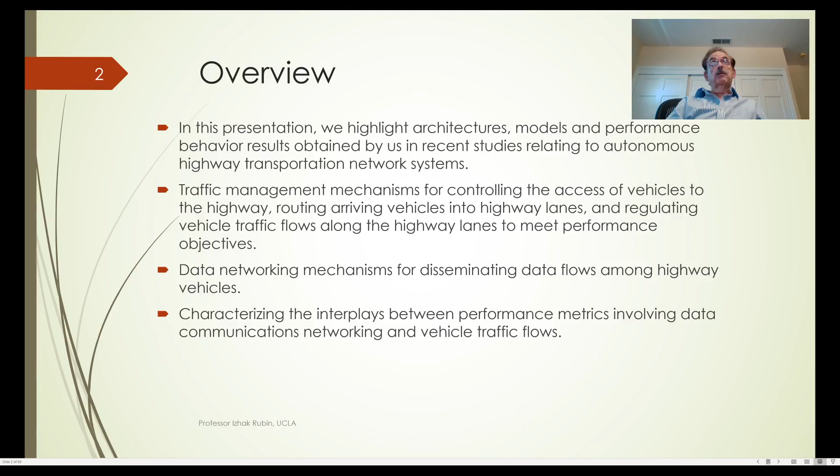I'll divide my presentation into two main parts. In the first part, I'll talk about traffic management mechanisms, and in the second part, I'll discuss data networking algorithms and protocols. At the end, I'll briefly discuss the interplays between the performance metrics involving data communication networking and vehicle traffic flows.

Results presented here are from joint studies and investigations with Professor Andrea Baiocchi at the Sapienza University of Rome in Italy, Dr. Julia Sagnotto, a PhD student of mine who just graduated at UCLA, and Professor Ion Turcanu, who is now at the University of Luxembourg. See also the references for other joint investigations.

I'll start by talking about traffic management for autonomous highway systems. The models that I am going to focus on here are presented in the paper noted below.

So we have a multi-lane highway with autonomous vehicles flowing on the highway in multiple lanes in both directions, even though I show here a single direction. As you see here, I have arranged the vehicles in platoons. Here is a platoon of vehicles, here is another platoon, and here is another platoon. In each lane, you see a platoon, and you identify a platoon leader as well as a platoon trailer.

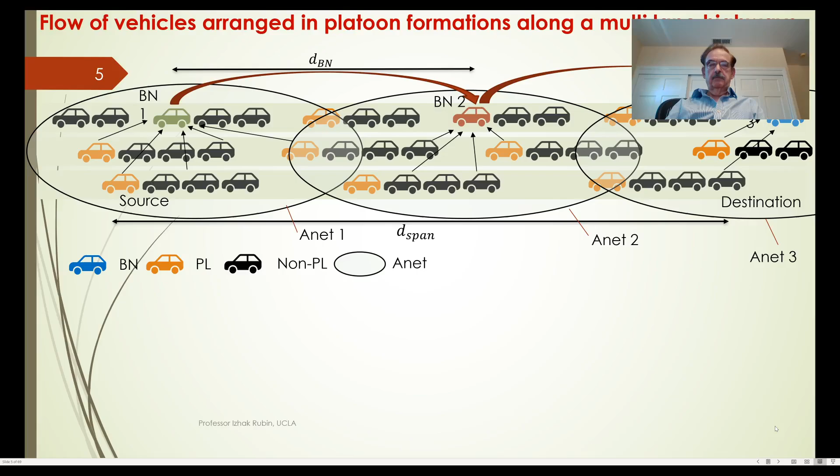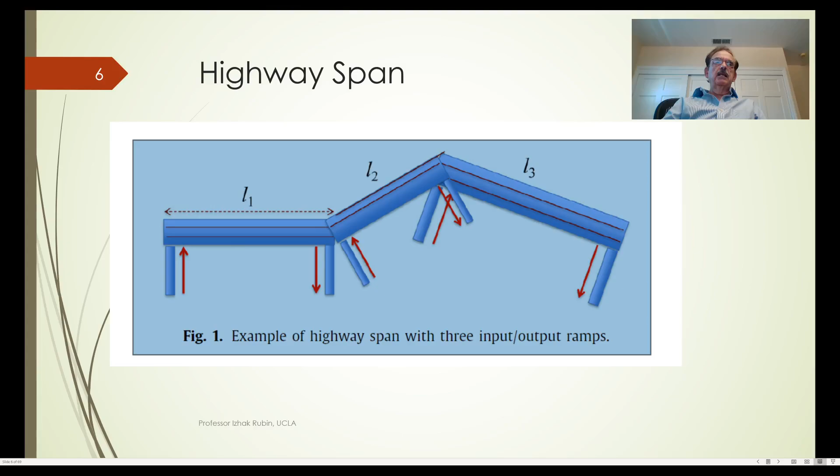So vehicles arrive to the link, they queue on ramp, they are admitted into the link in accordance with the admission mechanism, they are arranged in platoons, and then they flow across the link at specified speeds and with specified inter-vehicular distances.

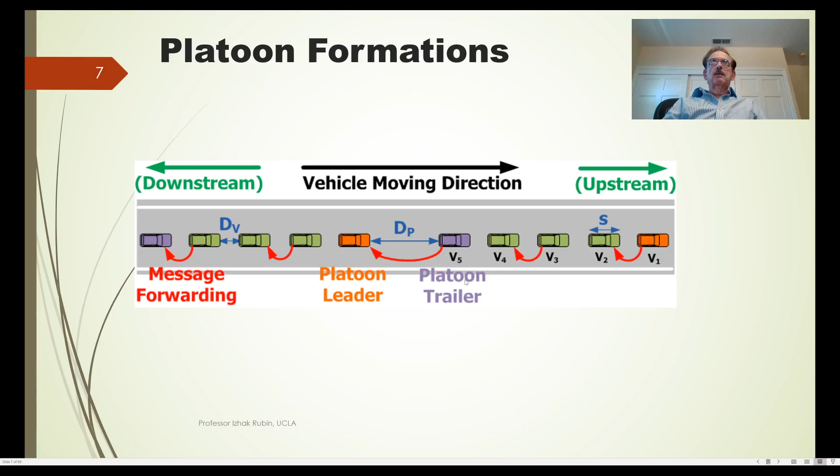So here I show the platoon formation. In this example, there is a single lane, vehicles are arranged in platoons, and you can see in each platoon multiple vehicles. dV is the distance between vehicles which are members of a single platoon, and dP identifies the distance between platoons. S is the span of a single vehicle. So if you look at this as a platoon, you see the platoon leader and a platoon trailer.

Other parameters in my model: the length of a highway link, L; lambda, the vehicular arrival rate at an entry point. The arrival process can be a Poisson process. Mu is the effective serving rate provided by the highway to arriving vehicles on the on-ramp. It's defined as the mean rate at which vehicles entering the link from its input ramp are admitted into the highway, in joining existing platoons or forming new ones.

Do note that many of the results I'm presenting do not depend on organizing vehicles on the highway into platoon formations, but I will keep this structure for my discussion.

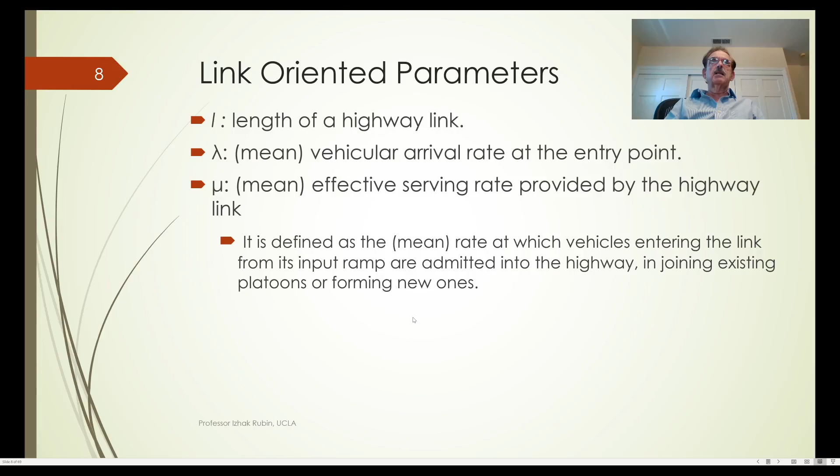Additional platoon formation parameters: DPL is the distance between two successive platoon leaders. DV, as I already indicated, is the minimum distance between vehicles that are members of the same platoon, and DP is the minimum distance between platoons. I model DP as equal to DV plus G, and G represents an excess gap range beyond DV. I synthesize G to account for the need for gaps between platoons to accommodate the transition of vehicles between lanes, vehicles arriving or departing from the highway, as well as vehicles that change lanes.

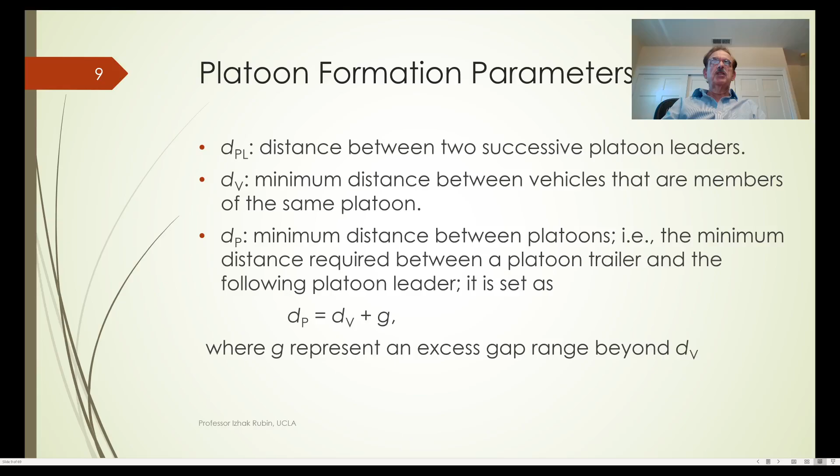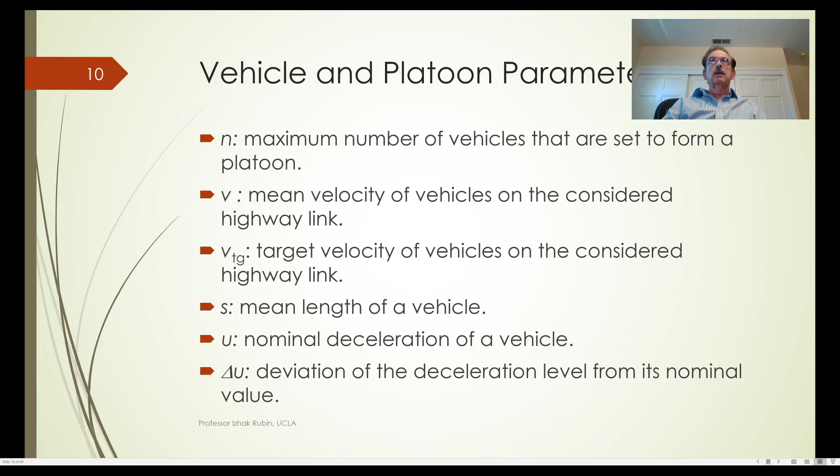Additional parameters: N is the number of vehicles in a platoon, V is the speed of a vehicle in a platoon. Other parameters I'll define later, but U is to be noted as the nominal deceleration of a vehicle—that means if a vehicle needs to suddenly stop, what is the deceleration rate.

Very important to note is that DV, the minimum distance between vehicles in a platoon, is proportional to V squared over 2U—the speed of the vehicle to the second power, divided by twice the deceleration rate—multiplied by a factor zeta, which accounts for the range of dispersion of the deceleration factors. So DPL, the distance between platoon leaders, can be expressed as the sum of these underlying parameters.

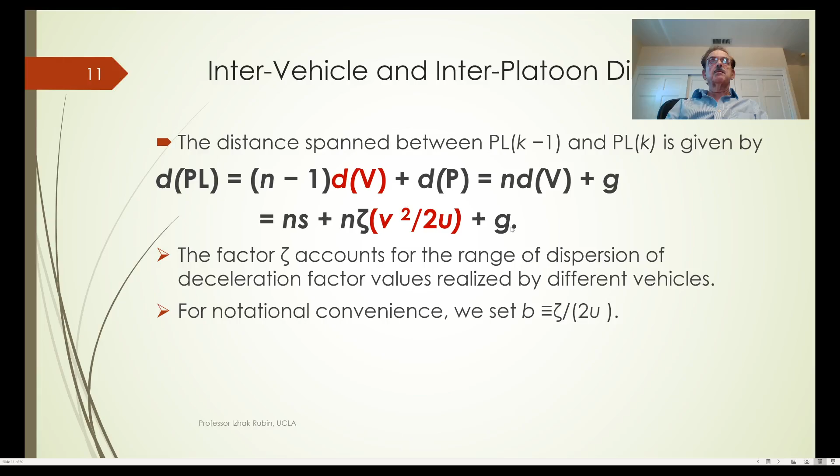Accordingly, I note the maximum serving rate of the highway link, realized when every platoon is available to admit into the highway n vehicles, is given by mu equal to n divided by dpl over v. That means if I can admit each time a platoon arrives at an access point n vehicles, the full capacity of a platoon, or a subset of it as we'll see later, but assume for now the full capacity of the platoon, noting that the time between platoon arrivals at an access point is dpl over v, then the admission rate and therefore the serving rate of the highway is given by that formula. Using the expression for dpl that I noted before, we get the underlying equation for mu.

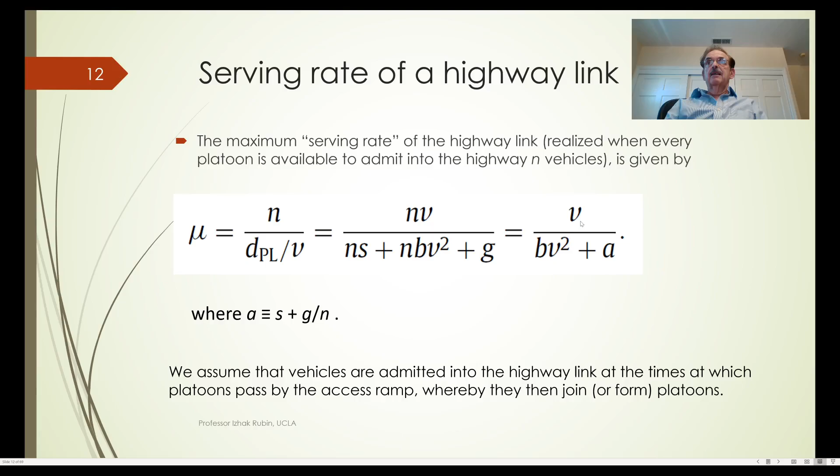Do note the dependence of mu on v, the speed of a vehicle. You have v in the numerator and v squared in the denominator. So what does that mean? It implies that the serving rate grows with v initially, and then it gradually decreases as v increases, due to the decreased density induced by the requirement of maintaining safety spacing ranges between adjacent vehicles.

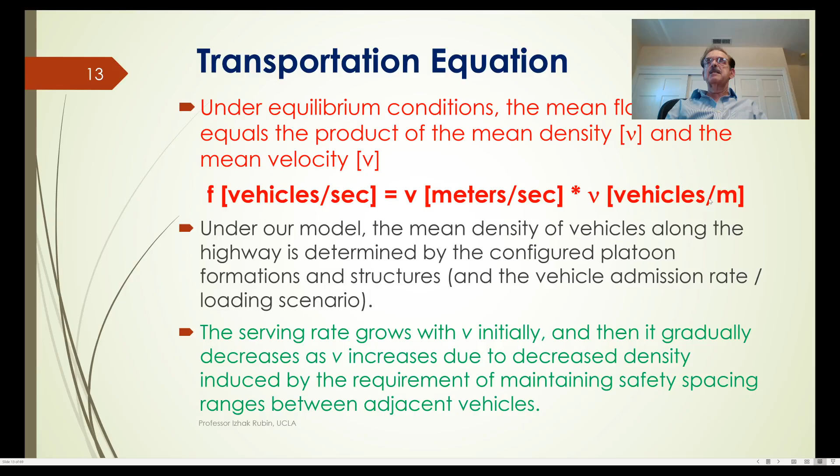In fact, noting the transportation equation, we observe that under equilibrium condition, the mean flow rate F is equal to the product of the mean density nu and the mean velocity v. Consequently, as we increase the speed of a vehicle, initially F increases. But eventually, as we increase the speed of the vehicle, and we have to keep vehicles apart from each other, the density of vehicles on the highway decreases, and the product yielding F starts to decrease.

In the model, I set the gap, the parameter that identifies an excess gap between platoons, to be equal to psi dv, where psi is larger or equal to 1. That means as I increase psi, I increase the gap to allow for more transitions of vehicles between platoons. If you look at this result, you can calculate what should be the speed of vehicles across a link in order to maximize the serving rate, and I give you here an example.

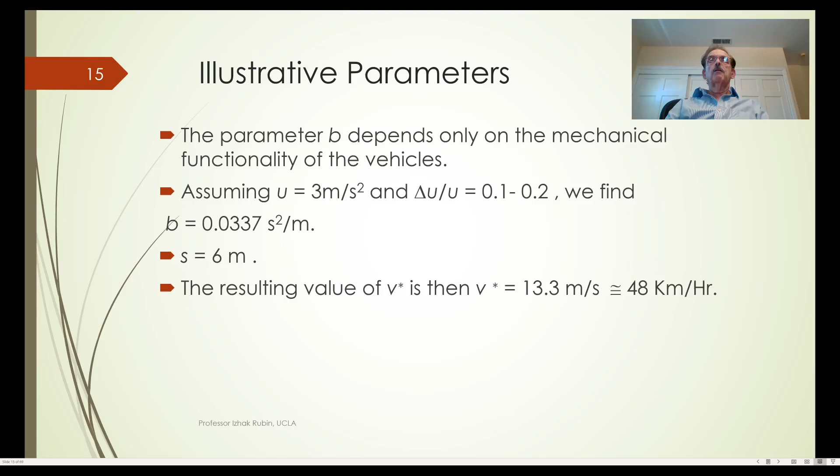However, of more interest for our study here is to find the maximum throughput rate F that can be accommodated across the link under delay constraints. We are setting here the following model: we account for both the incurred on-ramp access delay and the highway transit time.

So if you look at this equation, you see modeling the queue of vehicles waiting for admission across an incoming ramp as an M/M/1 queuing system. The expression here tells you about the average delay of a vehicle on ramp prior to admission. The second expression, L over V, is the transit time across the link, whereby the vehicle has to cross a distance of L at a speed of V. So the sum of the two is the total delay incurred by a vehicle in waiting on ramp for admission plus in transit.

I set an upper bound on that by defining D naught as a sum of two components. D naught Q is a targeted upper bound on the queuing delay to be incurred by a vehicle waiting to be admitted into the system. And L over V target is an upper bound on the transit time across a link of length L. In fact, what I'm interested in doing is synthesizing the system in such a manner that the sum of the two is attained.

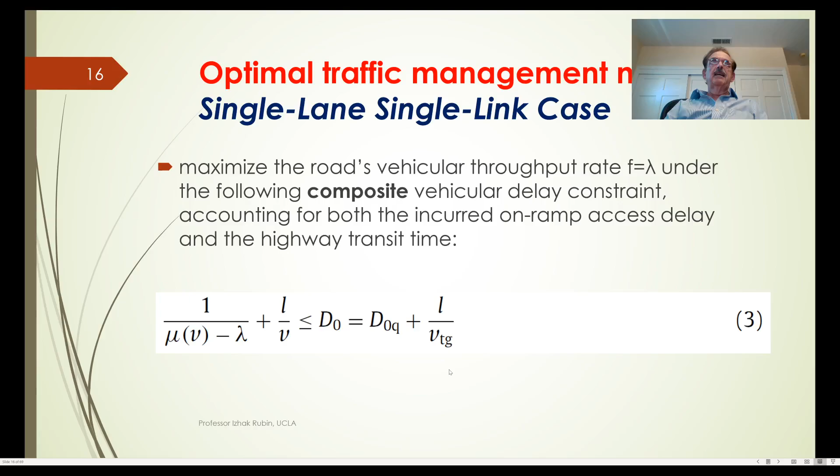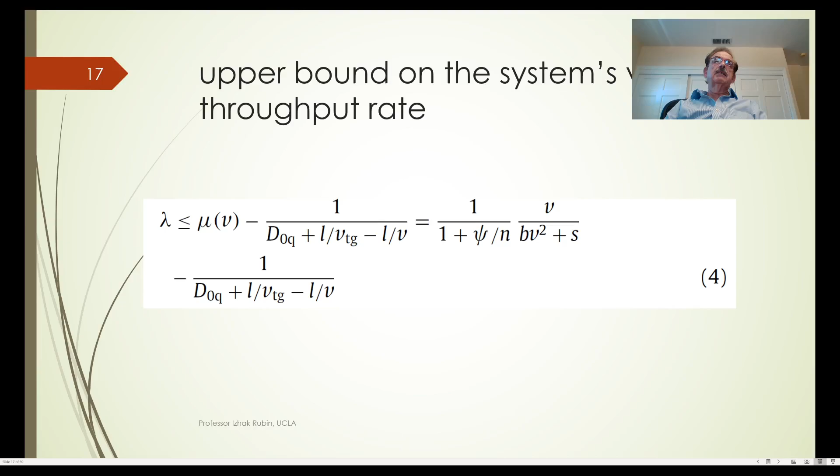Looking at the formula then for mu v and extracting the parameter lambda out of it, we immediately see that lambda is upper bounded by this expression. So in order to meet the underlying delay constraints, queuing delays plus transit delay, the arrival rate and subsequently admitted rate is upper bounded by this expression. This upper bound is noted here by the function f.

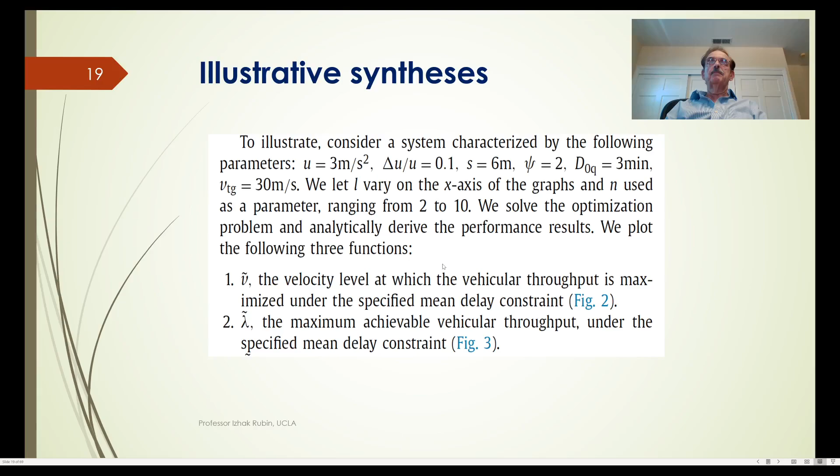So how do I synthesize the system to achieve the highest throughput rate under this delay constraint? I'll give you an example here. Let's take a look at the results of this example.

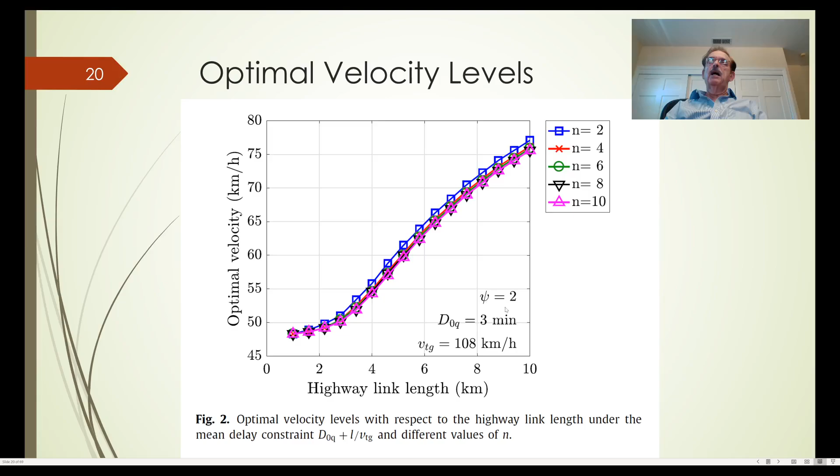In turn, if we calculate the optimal vehicular throughput rate across the different links of different lengths, we see that the highest throughput efficiency is obviously when the number of vehicles in a platoon is high, because then the overhead of the distances between platoons is not as large. We also see that the optimal vehicular throughput rate does not vary significantly over the link as a function of its length, even though the optimal speed does vary, as we've seen before.

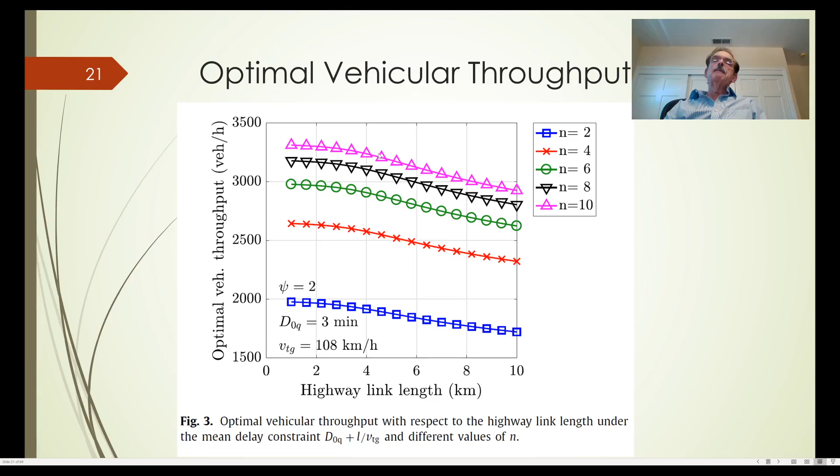And we can see that we can achieve a significant value for a very high vehicular throughput rate if we appropriately optimize the synthesis of the system.

Now I'm going to extend this model. We talked about a single link. Now what if we have a multiple link topology? Let's say first with each link consisting of a single lane.

For this purpose, assume that we have F as a set of vehicular end-to-end flows accessing the highway, L is the set of highway links, and lambda S is the mean vehicular arrival rate of external vehicle flows for flow S. If we sum the arrival rate of all the flows, we get the total arrival rate, lambda.

What we observe here is we consider the flow of each type, and for each flow, certain links are members of the underlying route, as indicated here. The mean rate of vehicles entering the highway through a ramp of link K is nu K, and the summation of nu K is lambda. Phi K is the vehicular flow in the kth highway link, also referred to as the internal flow.

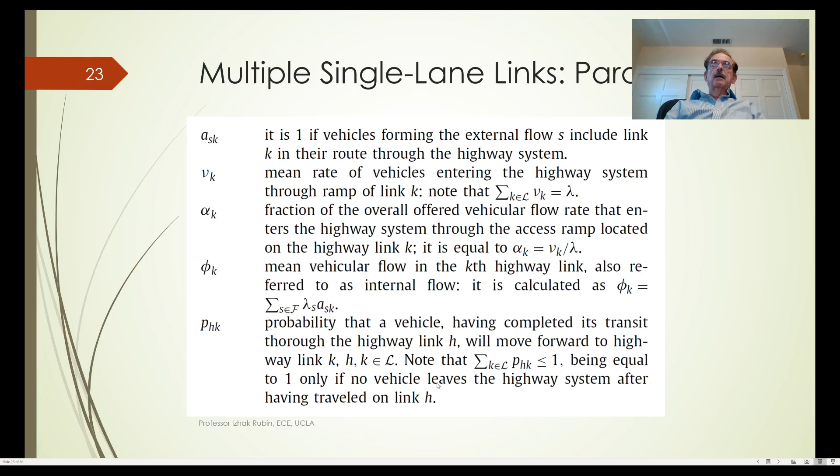Assume a Markovian transition matrix from link to link, so the probability PHK that a vehicle having completed its transit through highway link H will move to highway link K is PHK. The summation of PHK over K can be less than 1, as a vehicle can leave the highway after having traveled on link H.

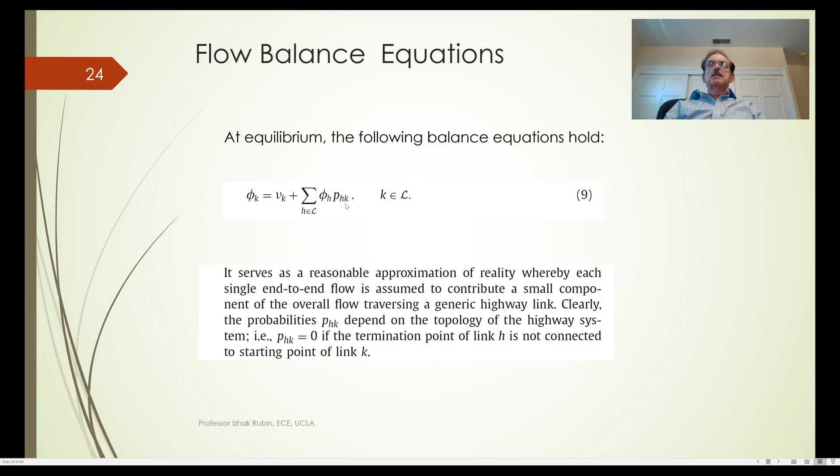As we do for queuing networks, we can calculate phi K by solving the set of coupled equations shown here. So given nu K and given the Markovian transition matrix, we readily calculate phi K, the flow rate at each link K.

So having such a network of links, let's look at a model that we have studied for synthesizing the system. What we do here is look at each individual link K and calculate the mean queue size or system size of vehicles waiting for access across the access ramp, which you see right here, and we add to it the mean queue size or system size of vehicles flowing across link K, transiting link K.

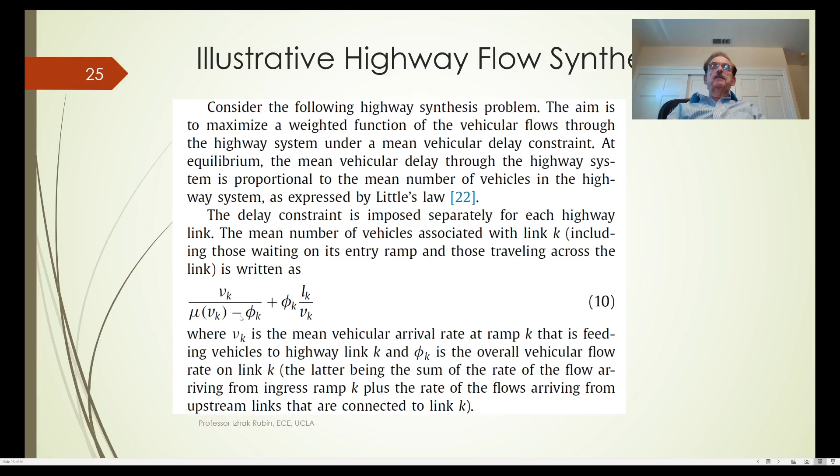Note that phi K is the rate of vehicles in length in link K, and note that I am using Little's law to express the mean queue size as a product of the underlying rate and the mean delay.

Looking at this expression, which is the sum of the queue size of vehicles on the input ramp and transiting link K, I am upper bounding it by taking into consideration the target delay for queuing on ramp, D0q, and multiplying by the flow of vehicles through the input ramp, and by the target transit delay across link K, LK over V target, multiplying that by the flow rate across link K in accordance with Little's formula. So I get a constraint here that takes into consideration the underlying delay objectives.

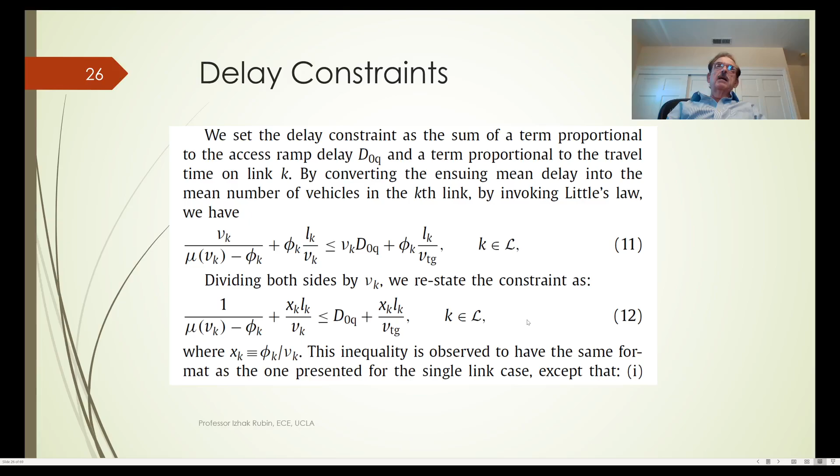I can manipulate this expression algebraically, whereby I divide both sides by nu K and define xK as phi K over nu K to obtain this inequality, which, if you look at it very carefully, is pretty much the same as we got for the previous case.

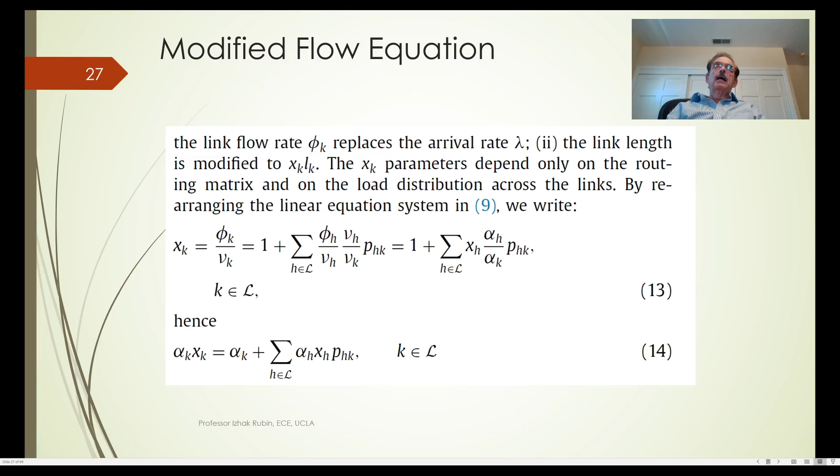We can write this set of linear equations for the calculation of xk, which is phi k over nu k. Nu k is given, and phi k was calculated before, so we can use this expression to calculate the ratio xk. That's readily calculated to start with. It depends on the distribution of loading on the system and the underlying route undertaken by each flow.

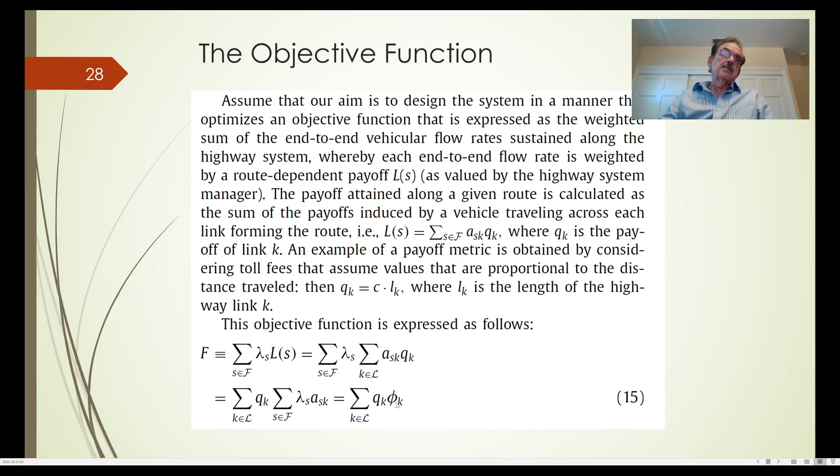To optimize the synthesis of the traffic management system, we assume a route-dependent payoff function, LS, defined here, whereby we can use a weight qk on link k, which can be proportional to the length of the link, or can assume some other cost function. The overall objective function f would be some weighted sum of the flows over the different links. Qk could be proportional to Lk, for example.

So the optimization problem in managing traffic across this autonomous transportation system is to maximize this objective function, f over phi k, such that this bound is preserved. This bound relates to meeting the delay objectives I indicated before. This upper bound induces a delay constraint on the flow on each link k, as shown here. And f is the same function defined before.

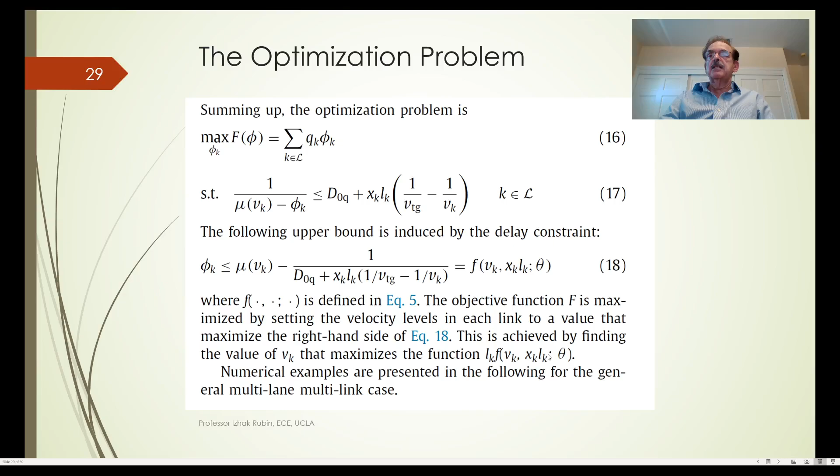So, in essence, I have to calculate the value of nu k, the velocity level at link k, that maximizes this function, times the weight. The weight could be proportional to Lk.

Let's consider an expanded system whereby I still have a multi-link topology, but instead of a single lane, I have multiple lanes across each link. Let phi ik denote the flow rate across link k, lane i. I get this bound on the total queue size as indicated before, relating to the delay incurred by vehicles admitted into link k and routed to lane i in link k. Note that I've chosen different target speeds for different lanes. For example, I can dedicate a certain lane to be a fast lane with a higher target speed, and others to be slower lanes.

So the corresponding bound is as follows. Assume I look at the flow phi k at link k, and I do the following: I look at the incoming flow rate nu k, and I allocate vehicles that arrive at link k to lane i with probability Rik. Across the input ramp, I have multiple queues, and vehicles are queued in multiple locations depending on the lanes I'm targeting them to go to. A fraction Rik of vehicles arriving at link k will be targeted to go to lane i. Similarly, I will set phi ik to be Rik phi k.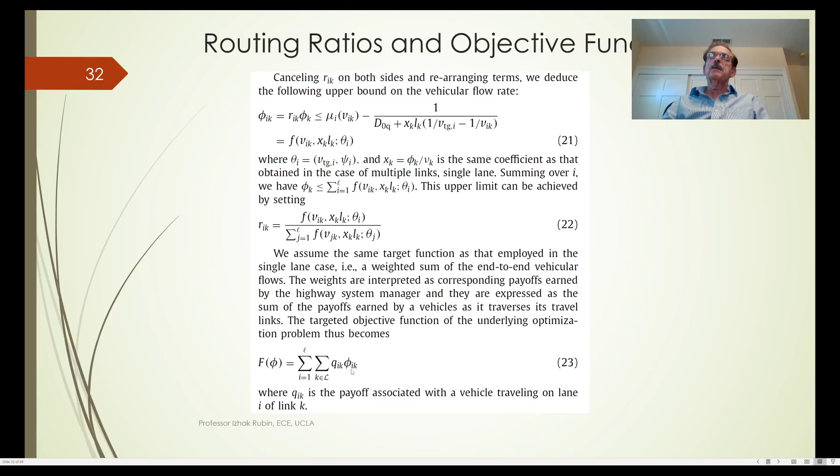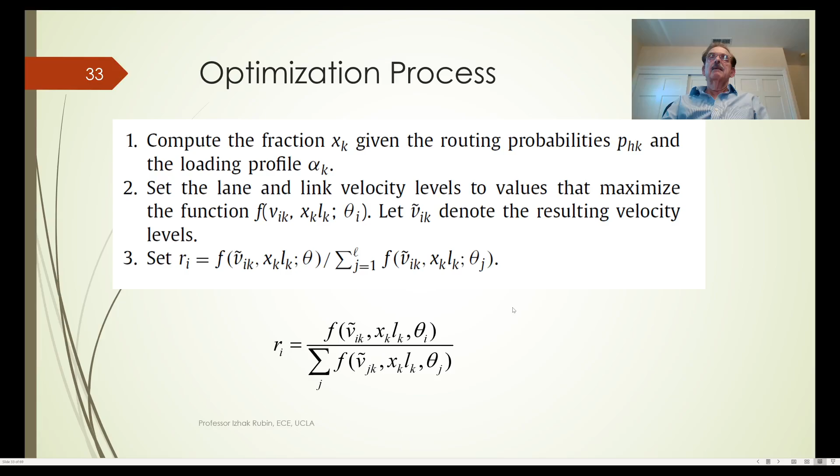Next, I would set the system to meet an objective function f defined similarly to before, with weight qik that can depend on the underlying lane i. Based on this setup, we compute first the fraction xk, as done before, based on the routing probabilities and the distribution of flows across the transportation network. Set the lane and link velocity level to values that maximize this function f, then calculate Ri in this fashion, and go ahead and calculate the objective function. For more detail, you can see the exposition in our reference paper.

We ran an example of a ring highway around Rome, Italy, and we observe the following design: you have lanes 1, 2, and 3. Lane 3 is a faster lane than the others, with a targeted lower mean delay. Interestingly, we can see that the vehicular throughput rate achieved across each lane, if there is a sufficient number of vehicles in each platoon, is quite high and about the same.

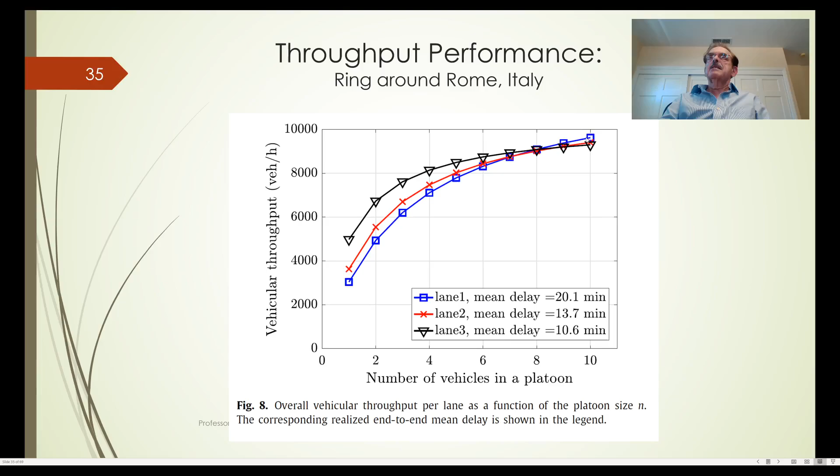In the fast lane, we keep vehicles away from each other and they move at a higher speed, but the product of the two gives you a flow rate which is about the same as a flow rate that we get at a slow lane, whereby the vehicles are flowing closer to each other at a lower speed. The higher density and the lower speed give you a flow rate which is about the same.

Second part of the presentation, I'll talk about data networking for the autonomous highway system.

The model I'm going to talk about here relates to dissemination to highway vehicles within a targeted span. A vehicle moving across the highway has messages it wishes to disseminate, multicast to vehicles within a certain range from itself. Messages can be critical or low priority. Critical messages have strict low latency requirements, while low priority messages have delay tolerance but may be produced at a much higher rate.

Looking at the requirement to support a variety of message classes in an autonomous system, depending on the message type, there are specifications of communication range—a message of a certain type issued by a vehicle needs to be communicated over 250 meters, 1,000 meters, or other ranges. These are the dissemination ranges, and they have maximum end-to-end latency and reliability numbers that we intend to satisfy.

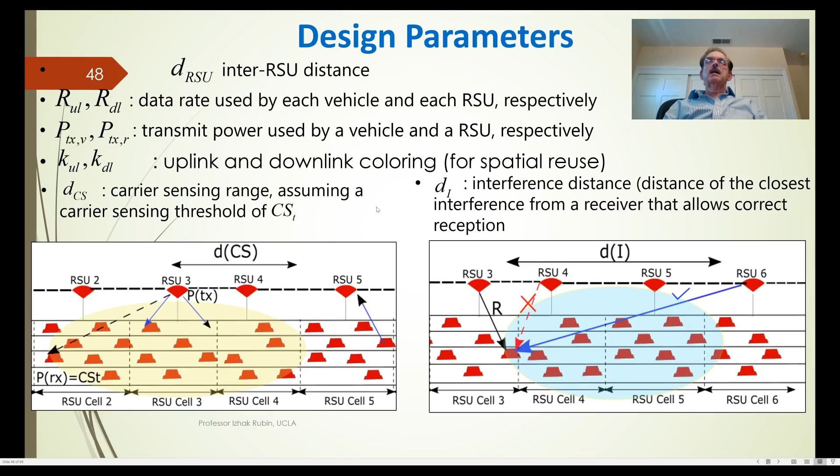To optimally design the system by setting the cross-layer parameters, we have to select all of these parameters shown here for the purpose of maximizing the throughput rate under some delay constraint. And we have done so. This is some examples of parameters to illustrate performance, and I won't go into that.

Of interest here is to see how the throughput efficiency of the system behaves as the density of the backbone changes. It gets more expensive to install RSU nodes closer and closer to each other. So as the distance between RSU nodes increases, the throughput efficiency will go down, but the question is by how much.

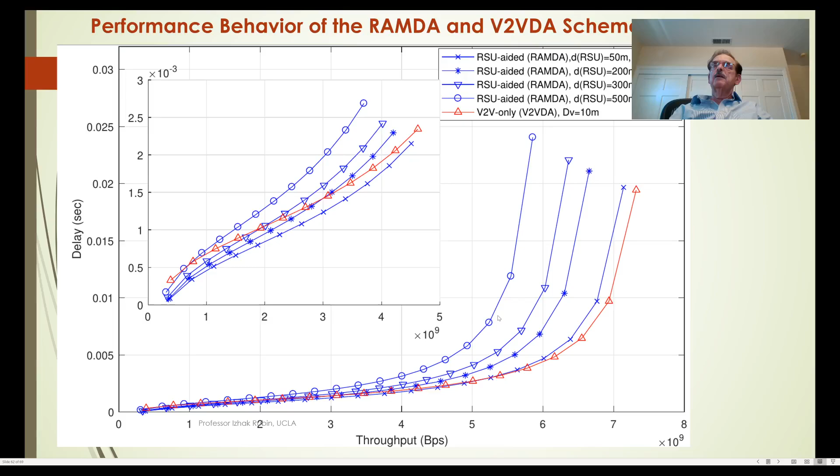Having high priority messages and low priority messages can be nicely accommodated by giving higher priority to the critical messages and setting them in such a manner that they achieve a very low end-to-end delay, as indicated in this performance curve. Then using the rest of the capacity, up to the maximum capacity or close enough to it depending on your delay objective, to support second priority messages. That's quite interesting, and this is summarized here.

Finally, let me make a brief note that when you look at the data throughput performance across the system, and when you look at synthesizing the system to achieve a high vehicular throughput rate, there is a trade-off between the two. In this example, this is done for a VBN-based architecture, but we have other papers done for other architectures, and the trade-offs are similar in the following sense.

Typically, when you achieve a higher vehicular throughput rate—average number of vehicles per unit time per unit distance supported by the highway—the data throughput rate will tend to be low. Interestingly, when you achieve a high vehicular throughput rate, the density of vehicles is somewhat higher, because in this example the speed of the vehicles for each optimization point is about the same. So the density is higher if you look at the average distance between backbone nodes versus the average number of vehicles accommodated between backbone nodes.